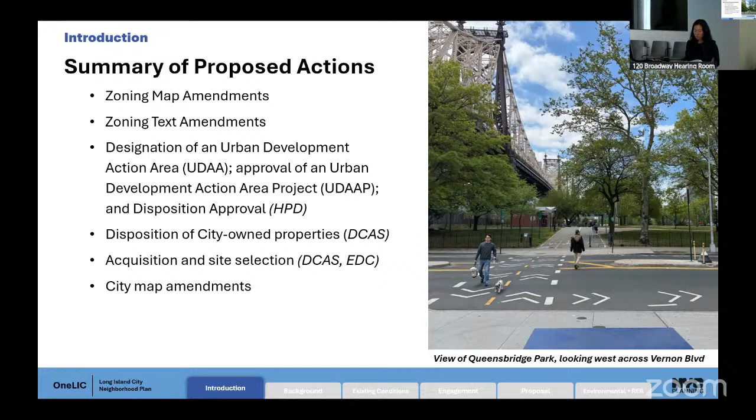With co-applicants DCAS and EDC, we are seeking approval for acquisition, site selection, and disposition of non-residential city-owned property. Lastly, we're proposing city map amendments to demap existing paper streets, adjust the width of other streets, and map a new public loop road.

The project area, shown by the dotted line, covers approximately 54 blocks of Long Island City in western Queens. The majority of the project area is located within Community District 2, which includes the neighborhoods of Long Island City, Sunnyside, and Woodside, while a smaller portion to the north is located within Community District 1, covering Astoria and parts of Long Island City. The project area is entirely within Council District 26, represented by Councilmember Julie Won.

Next, we'll share a summary of the history of Long Island City.

This 1940s photo captures Long Island City's East River waterfront, with the Manhattan skyline in the distance. To the right, the iconic Pepsi-Cola sign and Anable Basin are visible, key landmarks that speak to the neighborhood's deep industrial roots. Anable Basin once served as a critical site for maritime industry, with barges and ships transporting goods in and out of LIC's factories and warehouses.

LIC's waterfront location made it a prime destination for industrial businesses in the early 20th century. The opening of the Queensboro Bridge, Queens Midtown Tunnel, and the expansion of subway service connected Queens to Manhattan and helped fuel the area's growth. By the 1950s, LIC had become a manufacturing powerhouse. But by the 1970s, the neighborhood began to experience widespread vacancies in its industrial buildings, leading to job losses and a shrinking residential population.

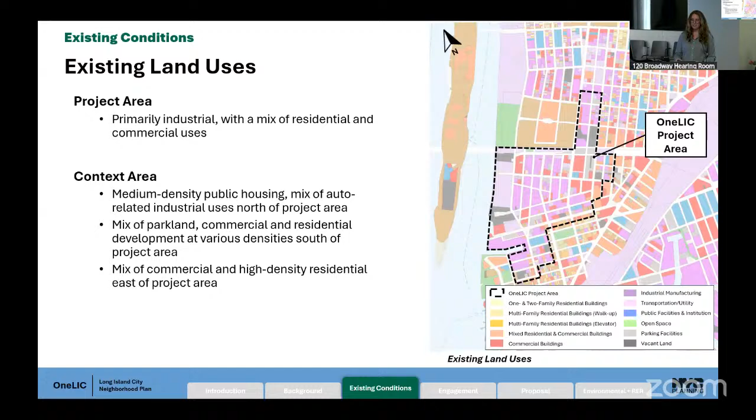Long Island City features some of the highest levels of transit accessibility in Queens. The wider context area is served by 8 subway lines, 15 bus lines, 2 Long Island Railroad stations, ferry service, and nearly 20 miles of bike lane.

The LIC context area is home to large waterfront open spaces like Queensbridge Park and Gantry Plaza State Park, while Murray Playground, Court Square Triangles, and Pocket Parks serve the inland area. Given the area's industrial legacy, there are few parks within the project area, but Gordon Triangle and 12th Street Plaza are well loved by the community. And the Long Island City Waterfront Pier serves as the only waterfront public access point to the East River.

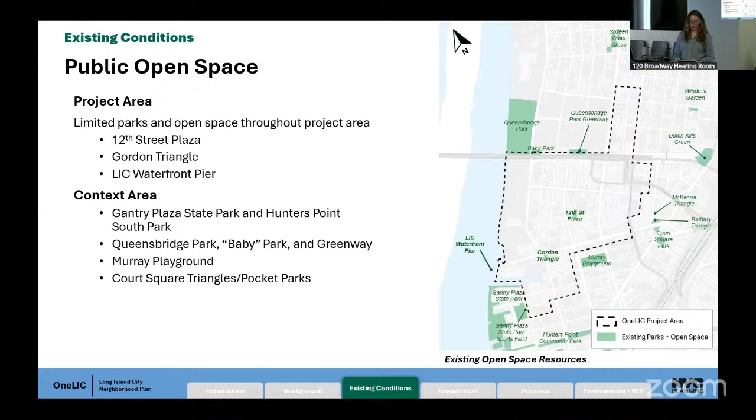Next, we will share existing conditions of the project area, broken down by 4 distinct sub-areas: the waterfront, corridors, LIC Core and Queens Plaza, and the industrial sub-areas. We will walk through the photos, starting with the waterfront.

Beginning with this view across Anable Basin, this photo shows where the basin and East River converge. The Queensboro Bridge can be seen in the background to the left, while Court Square can be seen in the distance to the right.

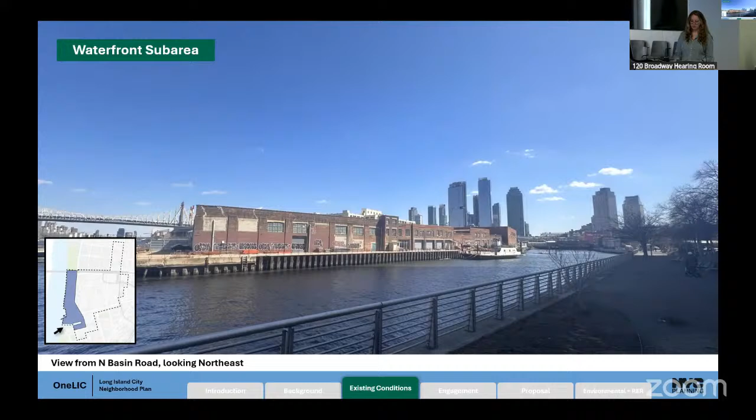Next, we move inland to Vernon Boulevard, a major north-south corridor within the project area. Looking south, this photo shows the intersection of Vernon and 44th Road. The mix of building types range from this 1940s New Deal era building on the right to more modern structures like the glass building on the left.

Moving north up Vernon Boulevard, looking east towards Court Square, this photo shows Queens Plaza South with the Queensboro Bridge above.

Next, we move to the corridor sub-area, which includes the area around 44th Drive and the area located east of the basin. This photo is taken from the intersection of 44th Drive and 23rd Street and shows a newer mixed-use development. The elevated 7 line can be seen on the right.

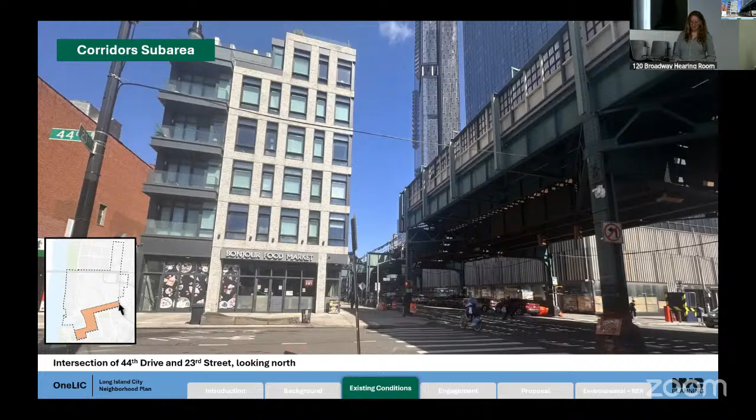Moving south to the intersection of 45th Avenue and 21st Street, we see a mix of medium-density residential uses with some active ground floors.

Next, the Core and Queens Plaza sub-area. This sub-area covers the area north of Queens Plaza and the area just west of Court Square. This view from 21st Street shows NYCHA's Queensbridge Houses campus to the left, juxtaposed by recent commercial development on the right.

Now, we jump to 43rd Avenue, looking west towards Court Square. This photo demonstrates the truly mixed-use feel of the neighborhood. Here, the elevated 7 line separates the older warehouses in the foreground with the newer development of Court Square in the background.

Lastly, the industrial sub-area, moving west to the intersection of 21st Street and 44th Avenue. This building, which houses the Queens Medallion Leasing, is representative of the area's unique local businesses.

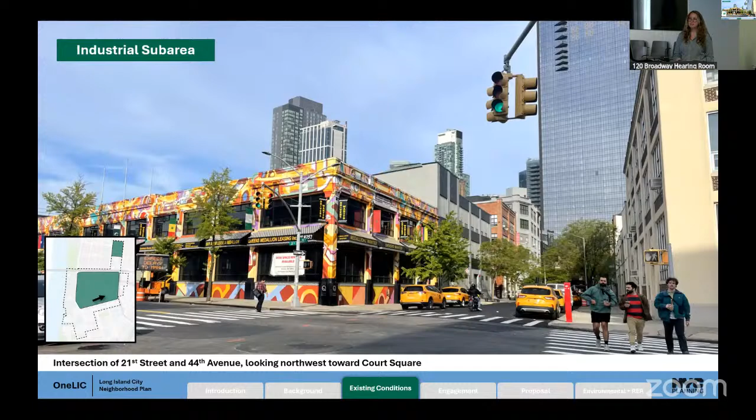Moving north along 21st Street to the intersection of 21st and 43rd Avenue, this photo captures the iconic Silvercup Studios, an example of adaptive reuse of the former Silvercup Bakery.

Now that we've seen what the neighborhood looks like today, we will continue with some of the broader trends and policies that have shaped it.

Long Island City's context area has seen a significant increase in residential development and an almost 100% population increase to go with it. Recent development has been concentrated around Court Square and Hunters Point South, including this mixed-use building pictured here, which is located on Crescent and 42nd Road.

Today, much of the project area is zoned with manufacturing districts, with mixed-use and residential districts zoned along the waterfront, Queens Plaza, and 44th Drive areas.

Despite Long Island City's many strengths and assets, today's zoning is outdated and presents key challenges, such that there are no requirements for affordable housing, low FARs limit growth potential for existing businesses, and unlike in other parts of the city, high-density districts are not eligible for plaza bonuses.

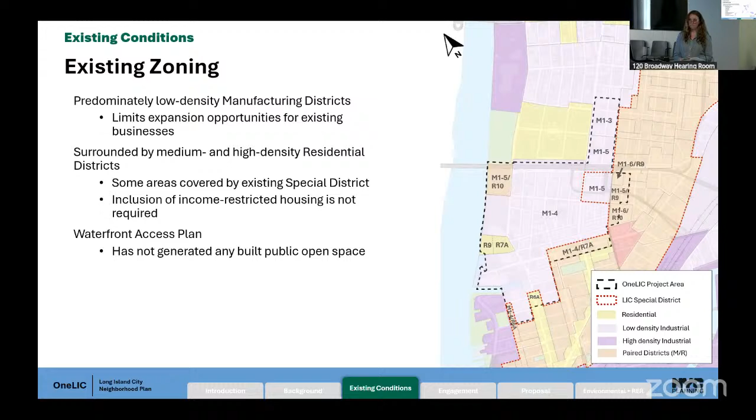Industrial business zones were established in 2006. They were created to support industrial and manufacturing businesses by providing a relocation tax credit to those choosing to move into IBZs. To create more certainty for these businesses, the tax credit was paired with a commitment by the city to not permit residential development in these areas.

There are currently 21 IBZs and 7 are in Queens. This map shows the LIC IBZ shaded in green.

Next, we move to business and job trends. Industrial businesses have historically provided a majority of jobs in both the project and context areas. Over the last decade, this dynamic has reversed with employment in both areas concentrated in non-industrial sectors, which includes office, local service, and institutional jobs.

The project area shows declining employment across all sectors, while employment in the wider context area is increasing. However, this growth is coming from non-industrial sectors.

The Woodworks building, located on 44th Road, demonstrates the shift from predominantly industrial uses to more commercial or mixed-use buildings. Where a single-story manufacturing building once stood, we now see a full-block, mixed-use, industrial and office development that caters to more neighborhood-serving uses, such as interior designers, sports clubs, and contractors.

Lastly, we have the Waterfront Access Plan, or WAP. The Northern Hunters Point WAP covers the project area's waterfront properties, including those along the East River and Anable Basin. The first of its kind in city history, the WAP was adopted in 1997 to set forth context-specific waterfront zoning requirements for the conditions along this stretch of the waterfront.

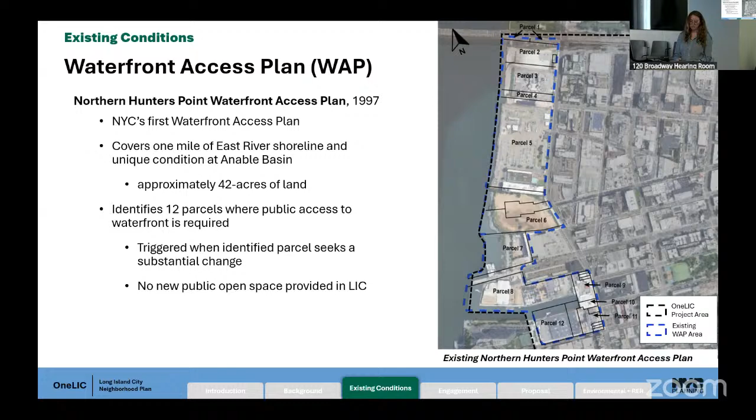Next, I will walk through our engagement efforts for this project. In fall of 2023, we kicked off engagement with the City Council member and WXY to facilitate a robust engagement process. We worked with residents, stakeholders, local businesses, community groups, and elected officials over the course of about 18 months to develop this proposal.

DCP, with Councilmember Won, WXY, and our agency partners, held a series of town halls and focus area meetings to learn about residential concerns, answer questions, and to share about existing city resources. Throughout this process, we've engaged with many agencies, especially HPD, Parks, EDC, DEP, and DOT, to align community feedback with ongoing work and to explore options for new city projects, programs, and policies.

In total, we held 16 public meetings and received over 5,750 comments from about 1,800 attendees. In the winter of 2024, the Department of City Planning and Councilmember Won's office each released surveys asking the community to share their vision for the city-owned sites. Combined, these surveys gathered over 2,350 responses.

The following goals emerged from over a year of community engagement and conversations with agency partners. Goal 1, create more housing for people at a range of income levels. Goal 2, create a connected, resilient, and accessible waterfront from Gantry Plaza State Park to Queensbridge Park.

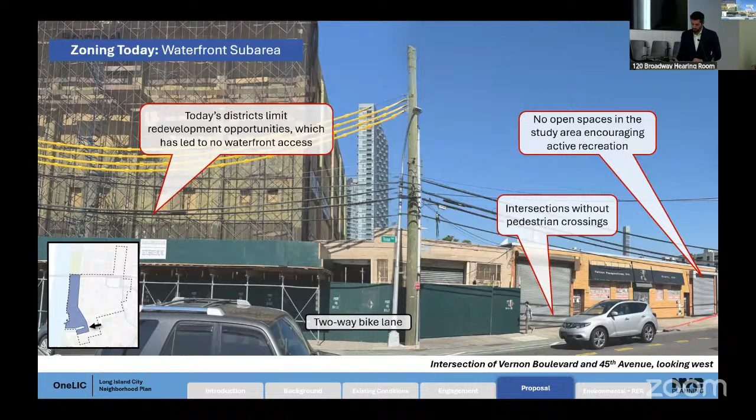And today, without a good reason to bring the public to the Basin waterfront, this stretch of Vernon Boulevard remains a deterrent for pedestrians and cyclists to navigate the area safely.

New buildings would be required to meet more stringent codes that would inspire a more eco-friendly urban character and improve climate resiliency. The proposed special district sets forth zoning regulations to encourage a built form that integrates new development within LIC's vibrant mixed-use character while balancing with controls to guide building form.

The proposed special district regulations for the waterfront sub-area are driven by the following urban design principles. First, the special district would include provisions to activate lower floors by requiring more access points to the waterfront, maintaining a lower base height along Anable Basin, and requiring that certain building frontages be occupied with active uses and designed to facilitate a walkable waterfront experience.

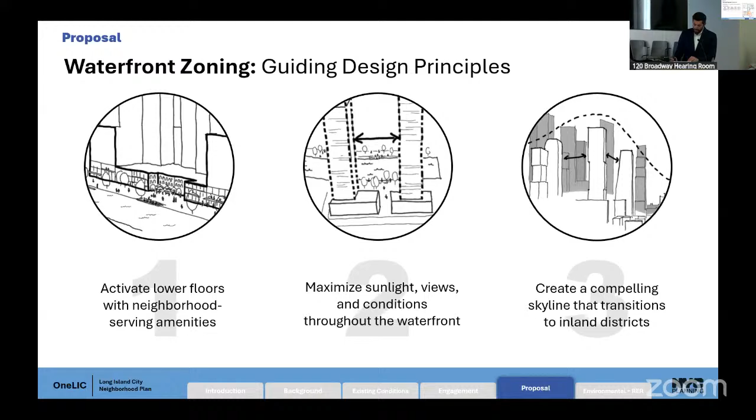As noted earlier, today's zoning along the waterfront is mostly M1-4, which restricts residential uses and limits the opportunity for business growth. The proposal would map an M1-6A/R9 district around Anable Basin and along the East River, and an M1-5A/R8 district on parcels fronting 44th Drive, continuation of our zoning treatment upland.

Our team has studied the unique site conditions and opportunities up and down this stretch of waterfront. The waterfront access plan embodies a long-term vision for a continuous waterfront open space that meets 4 core goals. First, it expands LIC's open space amenities to complement those found in Queensbridge Park, Gantry Plaza State Park, and Hunters Point South.

Secondly, it capitalizes on the setting of this unique waterfront to facilitate a mix of both active and passive open spaces. Third, it ensures design quality is beyond the city's baseline standards. And most importantly, it improves neighborhood resiliency.

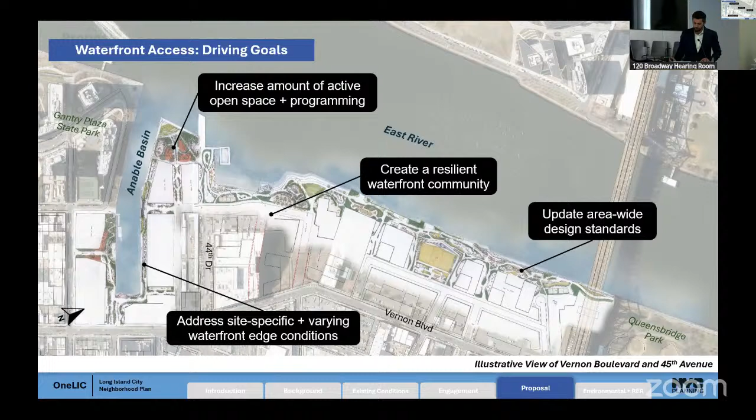While new buildings along the waterfront will be held to updated flood resiliency construction standards, this proposal includes other proactive measures to strengthen LIC's coastline.

The waterfront access plan will establish a target elevation along the shoreline to make sure waterfront open spaces are protected from sea level rise and can withstand some storm events.

Waterfront regulations will permit and encourage a variety of shoreline treatments to create a dynamic and engaging ecosystem along the East River and Anable Basin. Waterfront parcels will also be subject to stormwater catchment regulations through rules that were very recently updated.

And most importantly, the proposal to amend the city map includes the elevation of a new city street, which Hae-Kyung referred to as a loop road. This would lift a part of this sub-area well above future tidal flood depths and make it easier for new businesses to activate the sidewalk.

Another key piece of the proposal addresses a familiar challenge with many waterfront public access areas: there is often not enough space or incentive to provide active recreation amenities. We've consistently heard during community engagement that future open space needs to include a variety of activities for all ages and backgrounds, such as spaces for play, exercise, entertainment, and culture.

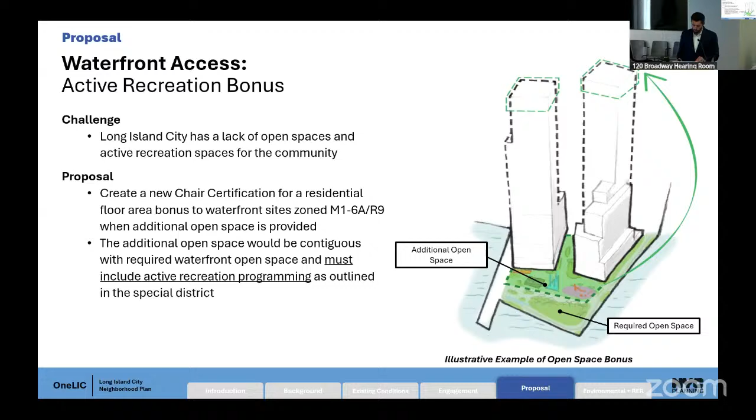The bonus would not only facilitate eye-catching open spaces, but a waterfront that can be enjoyed through different times of the year, open spaces large enough to include multiple levels of flood resiliency strategies, and open spaces that invite many people from sunrise to sunset.

The revised waterfront access plan would facilitate a stronger and more connected waterfront. While a core goal of this plan is to establish a north-south connection linking Gantry to Queensbridge, the points of access to Anable Basin and the East River are integral and are expanded through the provisions and regulations here.

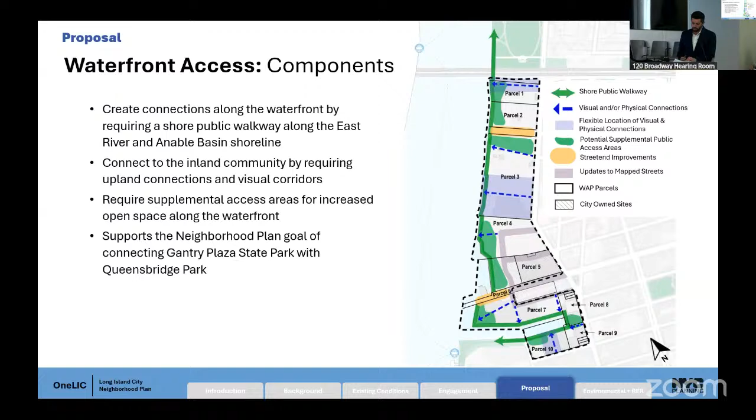This type of condition should not exist at the intersection of two legitimate main streets, especially where they are surrounded by one of the area's most notable public spaces. The proposed actions would remove this zoning impediment and help realize a new vision for these corridors.

By rezoning to new districts that permit residential, there is an ability to grow LIC's housing stock and require income-restricted units throughout this sub-area.

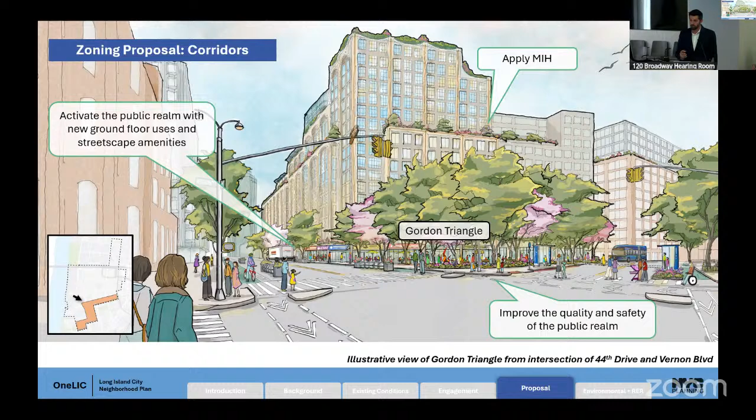Acknowledging the lower density character near Murray Playground and south of the study area, the proposed districts in orange and yellow would step down along Vernon Boulevard and further into Hunters Point.

Mandatory inclusionary housing is mapped throughout all of the shaded areas on this map to ensure future residential development includes income-restricted units. Here's a closer look at the height and setback controls for each of these M and R paired districts. Each district has a maximum base height and maximum building height.

The maximum permitted height of buildings scales up from 95 feet for mid-block areas east of Vernon Boulevard to 155 feet along 44th Drive, to 215 feet west of Vernon as one moves closer to the waterfront.

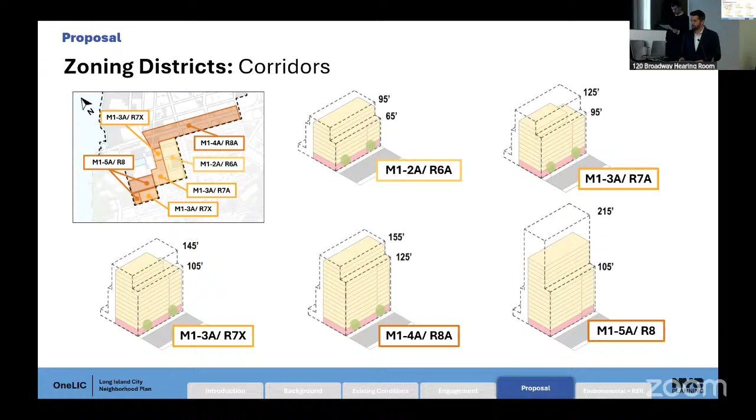I will now pass it off to Colin Ryan to proceed with the industrial sub-area. Thanks, Colin, and good afternoon, Commissioners.

Today's industrial areas within the IBZ are a workforce center, host to a variety of businesses. While many of them serve citywide needs like office construction, there has been a growth of businesses that directly serve the LIC neighborhood, such as barbershops, breweries, and sports clubs.

In recent years, the creation of the 12th Street Plaza acts as a public realm intervention for workers and neighborhood residents alike. However, today's zoning continues to restrict growth of these businesses, while the public realm conditions can be hostile for pedestrians seeking to access these amenities.

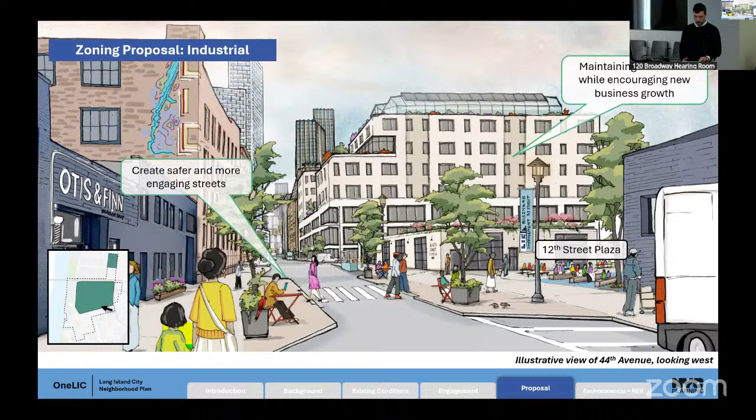The proposal for this sub-area would maintain the same uses allowed in industrial areas today while encouraging business growth. Building on the success of the 12th Street Plaza, the proposal would apply limited streetscape regulations along key corridors within this sub-area in order to create a safe and engaging public realm.

The proposal calls for applying a variety of M1A districts, mapping M1-6A, an 8 FAR district, closest to the high-density core of LIC. M1-5A, a 6.5 FAR district, would be mapped to step down away from the core and relieve constrained street networks. Lastly, the M1-4A will be mapped to right-size the needs in the more strongly industrial center of the IBZ and to the north as a step down to the Dutch Kills neighborhood.

Today's LIC core and Queens Plaza area hosts a variety of land uses. Within Queens Plaza, the redevelopment in recent decades has delivered on housing production, but underlying zoning did not require affordable housing. There are also no incentives within the existing special district to encourage the creation of open space, leaving the neighborhood without sufficient green spaces.

Other areas, however, are still zoned M today and are either vacant or underutilized based on the proximity to transit at the Queensboro Plaza and 21st Street Queensbridge stations.

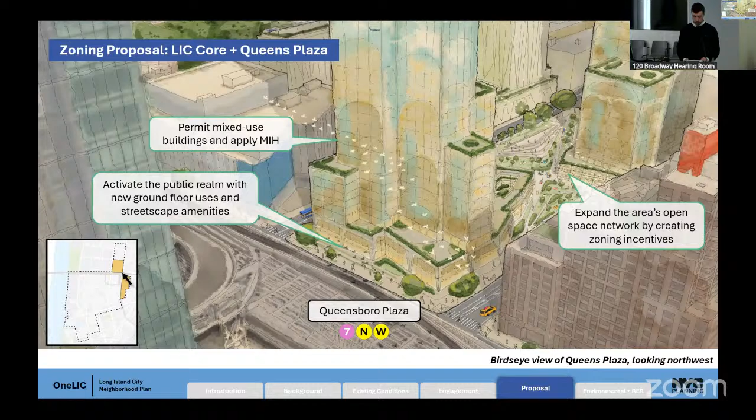The proposal calls for expanding and introducing high-density mixed-use districts as already mapped directly to the east, while providing income-restricted units. Streetscape regulations would be applied along key corridors in order to create an engaging public realm. An open space bonus would also be introduced to this area for the first time.

The proposal would map M1-6 paired with R9 and R10 districts adjacent to transit stations and existing high-density mixed-use districts near Court Square. The M1-6/R9 district permits a higher commercial and manufacturing FAR at 15, while the R10 paired districts permit a higher residential FAR, but max out at 12 across all uses.

Areas receiving no changes to use or bulk are currently zoned for the proposed districts. Zoning districts south of the Queensboro Bridge do not include a height limit, similar to the existing districts adjacent to them. This would provide flexibility in the envelope for the delivery of other incentives within the special district.

It would also encourage improved building forms through encouraging towers instead of bulky, squatter buildings that feel imposing at the street level. The M1-6A/R10 district to the north, however, would impose a height limit to 750 feet to address concerns of shadows on the adjacent Queensbridge houses to the west.

As mentioned before, LIC's open space network is very limited, particularly in the core. As part of the special district, sites larger than 25,000 square feet within the sub-area would be permitted to seek an authorization for a floor area bonus in exchange for providing publicly accessible open space. Proposals would require an application process that includes further environmental review.

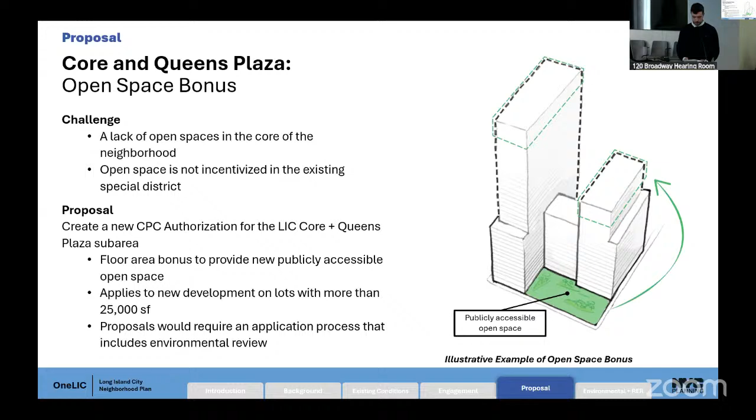Through engagement and close coordination with the School Construction Authority, we learned that there is a strong need for schools in this area, while finding appropriate sites for them can be challenging.

The limited number of public sites in the study area also requires the city to look towards private land to develop schools. In order to ease school siting, the special district would create an exemption for floor area used for schools up to 150,000 square feet. This exemption would apply across the entire project area. To accommodate bulk relief, the special district would also include an authorization for height up to a maximum of 30 additional feet.

The proposed actions also call for a zoning text amendment pursuant to Appendix F to map MIH to portions of the project area shown here in orange. This will result in approximately 4,000 permanently income-restricted units in Long Island City.

There are also site-based proposals with the related actions. The project area has 3 city-owned sites near the waterfront, centered along 44th Drive, 2 sites under the bridge to the Ed Koch Queensboro Bridge, and lastly, the Con Edison property, while not a city-owned site, is also subject to site-specific actions.

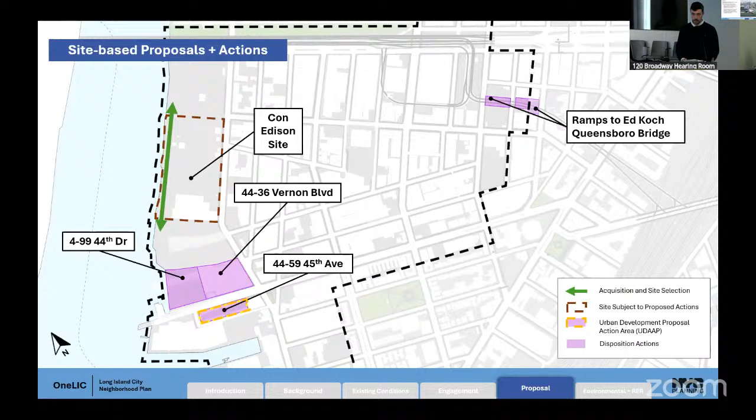3 sites along 44th Drive were the subject of a public workshop held this winter to better understand the community's vision for this portion of the waterfront. A set of community visions were developed based on feedback from the workshop. First, an active community space with housing, open space, commercial space, and community facilities to serve the needs of existing and future LIC residents. And second, a new waterfront open space that would complete the vision for a continuous public waterfront from Queensbridge Park to Gantry Plaza State Park.

Now that we've introduced the 3 city-owned sites, let's take a closer look at the specific actions proposed for them. This photo shows the existing structure at 4459 45th Avenue. The approximately 42,500 square foot site is currently used for the DOT storage and operations. The site is the subject of a UDAP action.

To meet the plan's goal of creating more housing for people at a range of incomes, co-applicant HPD is seeking a UDAA designation, UDAP project approval, and disposition of a city-owned property to facilitate the development of approximately 320 new income-restricted units, with potential space for a new community facility that could include an educational component and/or retail.

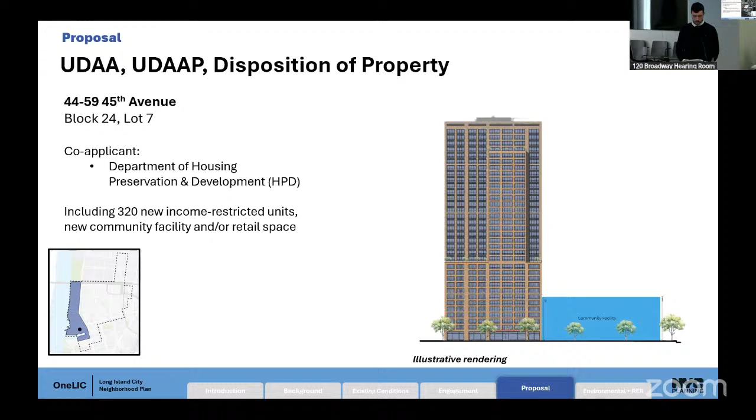With co-applicant DCAS, we are seeking disposition of the city-owned property at 4436 Vernon Boulevard and 499 44th Drive. These properties are currently occupied by DOE offices that support their citywide operations and an adjoining parking area. Community interest in the transformation of these sites has led to this proposed action. Approval of this action would give the city the ability to redevelop the site with community-serving uses expressed by the public during our engagement process.

Following certification, EDC plans to issue an RFI, or request for information. The RFI will allow respondents to share their concerns or concepts to convert all or a portion of the building to other commercial, light industrial, retail, and or community serving uses.

The lots under the ramps to the Ed Koch Queensboro Bridge are also subject to disposition approval at Block 428, lots 12, 13, and 16, and Block 429, lots 13, 15, and 29. The disposition action is necessary for the city to enter into any future agreement with private entities on the adjoining privately owned sites. At this time, there are no known projects, but this act would allow the city to maintain control over what development rights are conveyed for the greater need of the city.

Project development would occur through a future RFP process where detailed programmatic requirements such as open space would be outlined in a request for proposals.

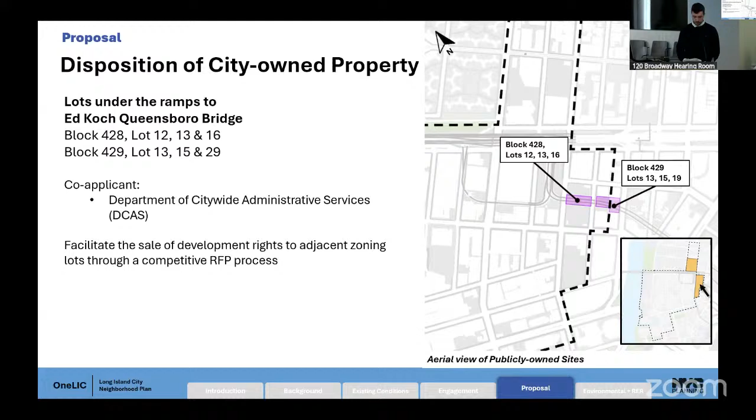A major waterfront property included is the Con Edison Learning Center, which fronts along the East River and is located approximately 600 feet south of the Queensboro Bridge. Due to its critical role as a training facility for the utility company, we do not expect redevelopment on this site in the near future. Regardless, the neighborhood plan strives to reach one of its leading goals to connect the East River waterfront from Gantry down to Queensboro Bridge, to the Queensbridge Park.

As co-applicants, DCAS and EDC are seeking acquisition and site selection of a portion of Block 488, Lot 114, which aligns with the nearly 900-foot-long waterfront portion of the Con Edison property. Approval of this action would grant the city the ability to acquire the waterfront portions of this lot in the future, facilitating the continuous connection along the shoreline.

The existing street network along the waterfront does not provide sufficient circulation to align with the proposed actions. For example, 45th Avenue is 30 feet wide, which is well below citywide standards, while 44th Drive, just a block to the north, is excessively wide along the block that it terminates at 100 feet wide.

In order to enhance circulation and right-size streets to create a distinct waterfront, we are proposing a series of changes to the city map, including mapping a new loop road, labeled here as 5th Street, connecting 45th Avenue and 44th Avenue, demapping street ends at 44th Drive and 44th Road, widening substandard streets at 45th Avenue, realigning portions of 44th Road, and narrowing portions of 44th Drive in order to create an accessible, intimate, and well-connected public waterfront.

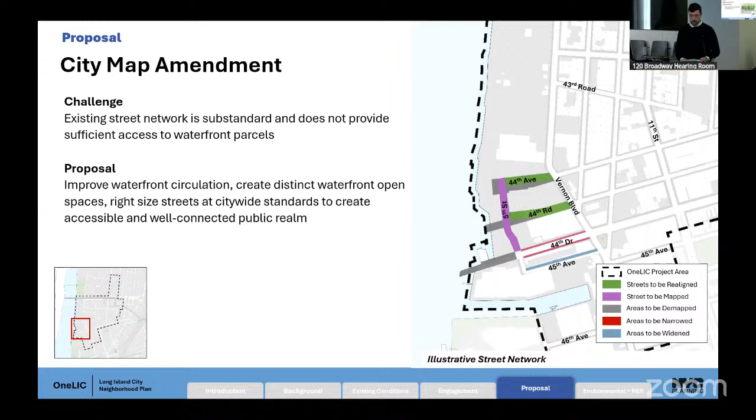In addition to land use actions, OneLIC also includes various city-led programs and investments to support the increase in density and land use changes. While long-term investment in the public realm and infrastructure are being considered, we want to highlight a few existing and ongoing investments, some of which are a response to recent engagement. These new capital projects reflect the city's commitment to a holistic neighborhood plan.

For example, DEP is working closely with DCP on a drainage analysis of localized and area-wide sewer planning.

Also, as you can see on the slide, New York City Parks is currently making additions to Queensbridge Baby Park. This park is located between Queensboro Bridge and the Queensbridge houses, which was previously a maintenance yard, and is being turned into a community gathering space that includes a lawn, benches, and game tables.

The School Construction Authority, or SCA, has a number of planned investments and ongoing projects in LIC. By academic year 2029, the neighborhood will see 2 new elementary schools with approximately 1,100 new school seats.

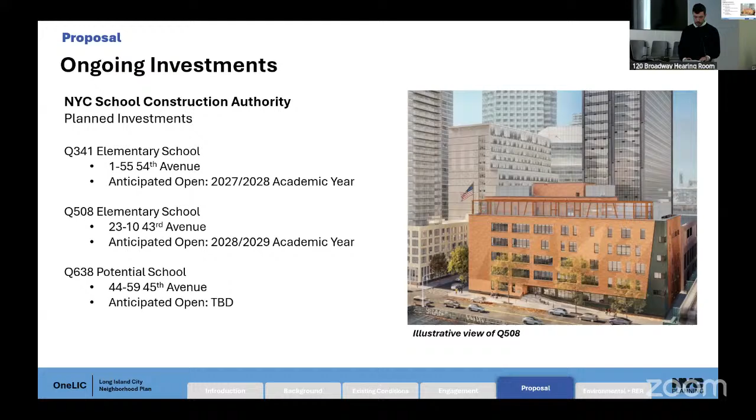In addition to generating new income-restricted units by applying MIH and the development of new units on city-owned land, we also seek to preserve affordability through a range of tenant and homeowner protections through HPD programs.

To proactively combat landlord harassment and tenant displacement, the city will launch the Partners in Preservation Program in LIC and Sunnyside, which funds local community-based organizations to do tenant organizing, canvassing, and know your rights workshops.

To retain and stabilize homeowners and support generational wealth building for LIC residents, the city is investing in the Homeowner Help Desk, a one-stop shop for financial and legal counseling around foreclosure prevention, deed theft, and home repairs. The city is also increasing access to Home Fix 2.0, a low and no-interest home repair loan program.

Partnerships with local CBOs and elected officials to educate tenants and homeowners about their rights and available resources will also be offered through trainings, classes, and resource fairs.

Finally, and thank you for bearing with us, I'll summarize the findings of the environmental analysis and racial equity report.

As part of this application, a draft environmental impact statement, or DEIS, was prepared. DCP, acting on behalf of the CPC as lead agency, issued a notice of completion of a DEIS on April 18th, 2025. Where the DEIS does not identify significant adverse impacts, technical areas have been grayed out.

On the questions that other colleagues were asking about the schools and the open space impacts, just wanted to drill down on those a little bit. On the schools impact, which is fairly significant, as the DEIS notes, 140% over the 10-year build-out, in a place where it's very, very hard to find sites, as you've pointed out.

I'm wondering whether any of the private development sites have raised their hand to say yes, we will take the floor area bonus if the rezoning proceeds. And, again, to put some helpful pressure on the conversation, whether there's been any meaningful interest around actually using the floor area exemption, I should say.

There are conversations that are continuing to be had with some of the developers. Their interest in helping and being part of this neighborhood is also critical to them. So the conversations are being had.

Okay, so I guess, just echoing the earlier point about Con Ed, that putting some pressure on the development community here to actually then take advantage of the exemption, given the amount of floor area we're talking about. Thank you. And two, over the course of this process, really come forward with some thoughts on which sites make sense.

And then on the public space side of things, under the Queensboro Bridge, which is, if we're really going to connect this to NYCHA, we have to figure that out. I know DOT, whether it's under the Brooklyn Bridge on the Manhattan side or the Brooklyn side, or the Manhattan Bridge on the Brooklyn side, has struggled to release its under-the-bridge assets, but with enough political pressure finally does. So I'm just curious where DOT is on that conversation of releasing that space.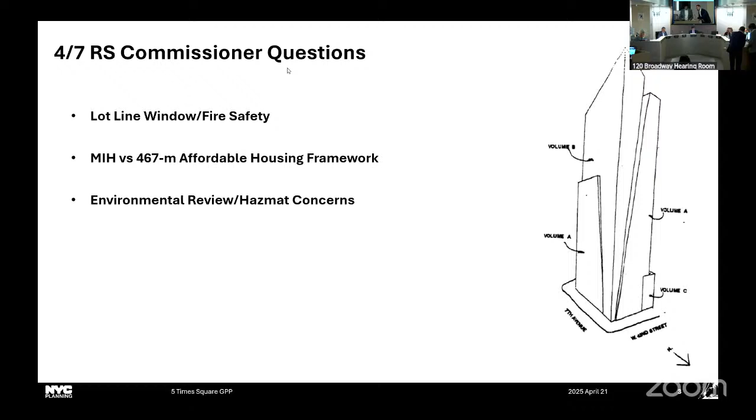Well, so in this case, being a GPP, MIH isn't applicable, but the applicant's complying with 467M. We don't have the scope to enforce MIH here, so they're complying with the regulations of the MDL, which require affordable above 12 FAR, and in this case, it dovetails with 467M. So that's 25% at 80% AMI.

Okay, I think my question is slightly different, which is that if this were a zoning change to allow for residential in a zone that only allowed commercial, presumably we would match MIH, and we'd have 25% at 60 AMI with 10% at 40 AMI, or another option that the commission thought were appropriate.

In this case, I think we have to send a recommendation back to ESD. So I'm just trying to understand why our recommendation wouldn't be back, hey, we have an affordable housing framework in New York City that facilitates conversion of buildings. It happens to be at different AMIs than state legislation, but we want to go further, and we think we have a rationale for why, and we think it works economically, which is why we apply it in MSMX or other areas where we're doing similar conversions.

We could add that. If the commission would like, we can add that into the letter recommendation as our recommendation of the ESD board. I mean, I think my perspective is if this were in the MSMX, for example, we wouldn't be permitting the 25% and 80.

So just because it happens to be a few blocks north and subject to a GPP rather than a zoning change, I think for the sake of consistency we should make clear that's our affordable housing framework. Your recommendation would be to refer to what our rules would otherwise have been if done through MIH, and encourage them to go as far as they can here. I have no objections to that. Okay, so we can include that in.

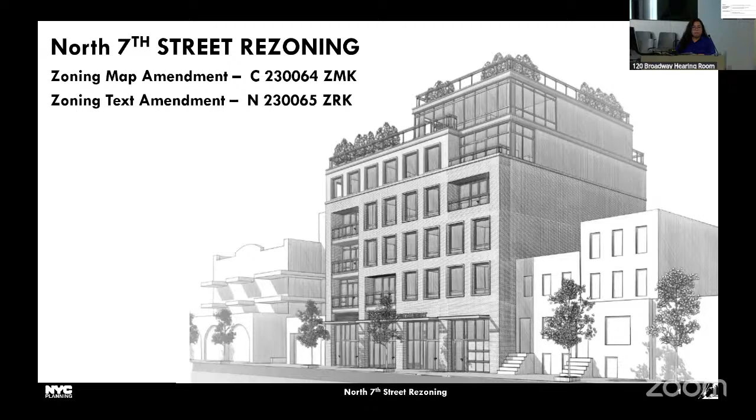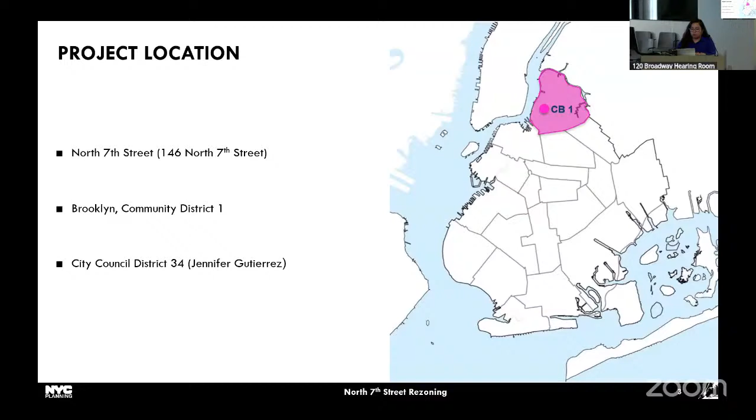Good afternoon, Commissioners and Chair Garodnick. Today I will be presenting a private application for a zoning map amendment and zoning text amendment at 146 North 7th Street for a pre-hearing. You first heard about this project proposal on January 6, 2025. This is a private application by 4 private homeowners to facilitate the construction of a new 6-story mixed-use building. The applicant is seeking a zoning map amendment from R6B and R6B/C1-4 to R6A/C2-4, and a zoning text amendment to map an MIH area with options 1 and 2. The project is located within Community District 1 in Williamsburg, Brooklyn, and is within Councilmember Gutierrez's district.

The proposed building will include approximately 3,320 square feet of commercial floor area, 23,554 square feet of residential area to build 28 dwelling units, 7 of which are income restricted. The building will provide 19 parking spaces for bicycles and 3 voluntary parking spaces.

The applicant is proposing a zoning map amendment from R6B and R6B/C1-4 to R6A/C2-4 to facilitate the construction of the proposed development. R6A is a contextual zoning district that permits a residential FAR of 3.9 with MIH and a community facility FAR of 2.2, with a base height of 65 feet and a max building height of 95 feet. In Zone 1, or the inner transit zone, no parking is required. C2-4 districts are commercial overlays that facilitate ground floor commercial uses and have looser parking requirements than the existing C1-4 district.

The applicant is also proposing a zoning text amendment to Appendix F to map MIH. The applicant is mapping MIH Option 1 and MIH Option 2, each of which requires income-restricted housing set-asides, where Option 1 requires 25% of units at an average of 60% AMI, and Option 2 requires 30% of units with an average of 80% AMI. There are 9 MIH areas mapped in Community District 1 between 2021 and 2024.

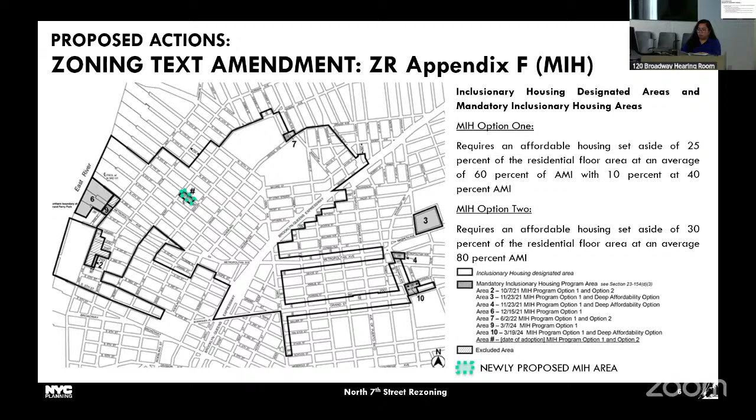The application was referred out to the Community Board for 60 days. During this time, the Community Board met and voted to unanimously approve the application with conditions. Community Board members expressed their concerns in the resolution, requesting that the Community Board office and the community be provided with a point of contact to receive and respond to problems and complaints during construction. The applicants will actively communicate with the Community Board office and provide a schedule of activities that will affect the neighborhood. Finally, in good faith, the applicants will consider contributing to the enhancement of the nearby streetscape.

The Borough President held a hearing on March 26th and submitted a recommendation of approval on the evening of April 15th. This concludes my presentation, and I'm happy to take any questions.

Questions? Okay, great. We will pick this one up on Wednesday. Thank you very much. Great. Thank you.

The 11th item on our agenda is a pre-hearing review of a zoning map, disposition of city-owned property, and a city map amendment in the Bronx Community District 10. Our presenter is Stephen Johnson. Hello, Stephen. Hello, good afternoon.

This is an application by Bally's New York Operating Company, LLC, for a city map amendment, a zoning map amendment, and a disposition of city-owned property to facilitate the development of a gaming facility and associated uses located in Ferry Point Park in the Bronx. The City Parks Department is a co-applicant on this project, as they are on all map change actions related to parkland, and the Department of Citywide Administrative Services is also a co-applicant related to the disposition action.

In this presentation, when I refer to the applicant, I am referring to Bally's. The project was certified on January 21st and is back for a pre-hearing review session. The City Planning Commission public hearing will be on April 23rd. It will also serve as the public hearing for the draft environmental impact statement. Written comments for the DEIS are accepted by the lead agency until 5 p.m. on Monday, May 5th, 2025.

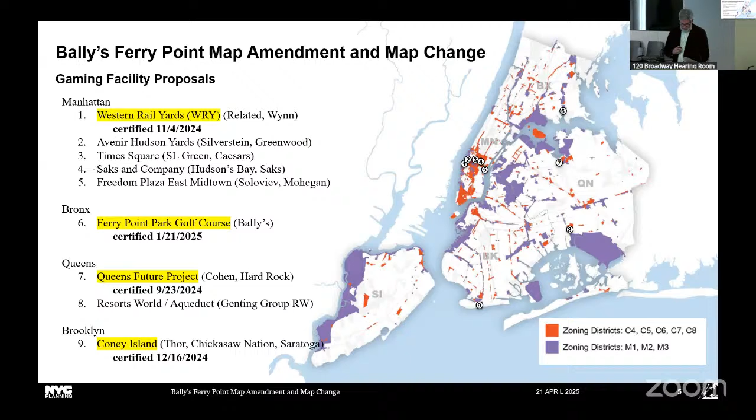The state's current schedule is up here on this slide. All applications must be submitted to the state by July 27th, which is also the start of the Community Advisory Committee review period. Each individual CAC will have public hearings and solicit feedback from the public, then vote by September 30th, 2025, requiring a 2/3 majority to approve, before forwarding the application to the gaming board.

Ferry Point Park was initially a 171-acre parcel that came under the jurisdiction of Parks in 1937. The development site was a landfill from the 50s, 60s, and 70s.

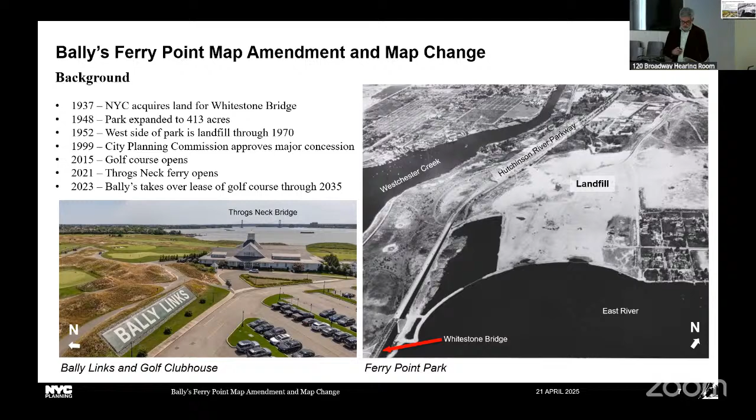The City Planning Commission approved a major concession for a golf complex in 1999, and the public 18-hole golf course opened in 2015.

This is the area map of the proposed development. There's a small residential area to the west and a manufacturing area to the north. This is an illustration of the proposed development site.

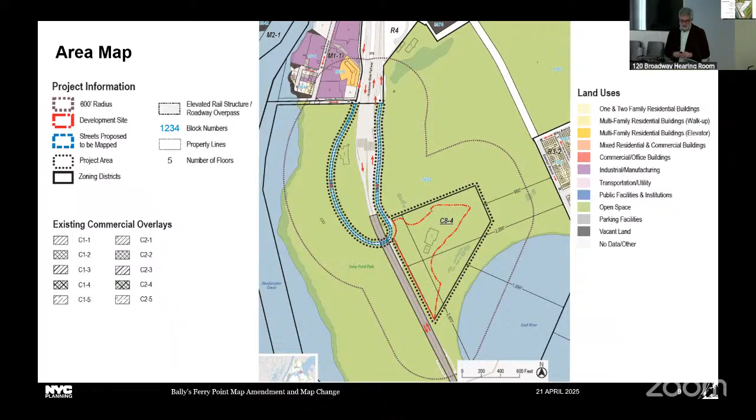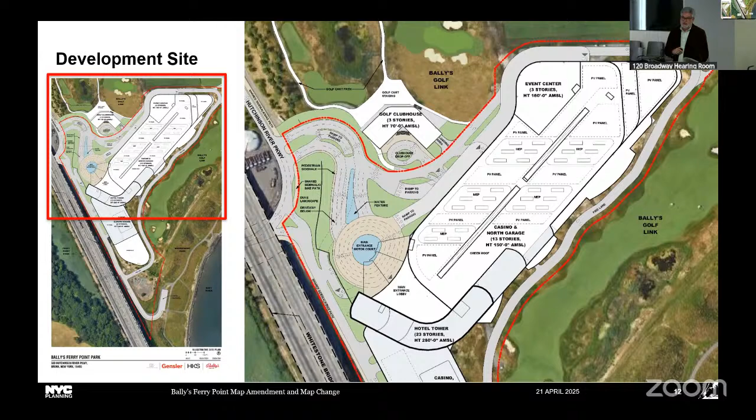Here is the southern end of the proposed facility. You can see the proposed widening of the waterfront access roadway with a new bike path. This road leads to a small public parking area and walking paths into the waterfront.

Here we have an existing condition view from the Bronx Whitestone Bridge. You can see the existing clubhouse behind the flag that's waving there. And this is the proposed development from a similar angle with the building heights.

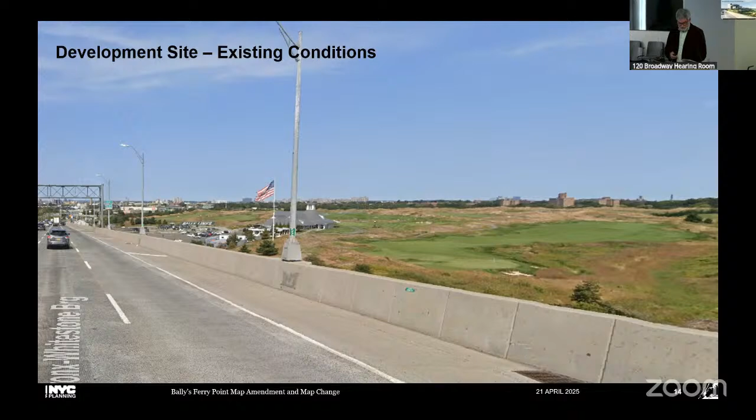So now Bally's has committed to a number of improvements. If the project moves forward, many of them are related to park improvements and would be determined in consultation with the community board, local elected officials, and the Parks Department. The applicant has also proposed a number of transportation improvements related to Ring Road, new bus stops, ferry shuttle service, and pedestrian and bike paths.

The proposed gaming facility is planned to be a Gold LEED certified building. The applicant believes this would be the largest private development in the history of the borough, and includes 15,000 construction jobs and 4,000 permanent jobs.

One item I want to mention that's new from when it was certified - I included a PDF in your briefing packages on this material. The applicant has proposed a community benefit fund that would fund a variety of local projects, such as schools, sports, and health concerns, and the applicant can describe that at the public hearing.

So just moving quickly on to the actions here. As I mentioned, the first is the city map change, which has two parts. The first is to demap a 15.7 acre area of parkland corresponding to the proposed gaming facility, and to map a city street under the jurisdiction of the city DOT.

The second action is a zoning map amendment. The applicant is seeking to map a C8-4 zoning district in a portion of the development site. The C8-4 permits commercial uses with a maximum FAR of 5, with no residential uses.

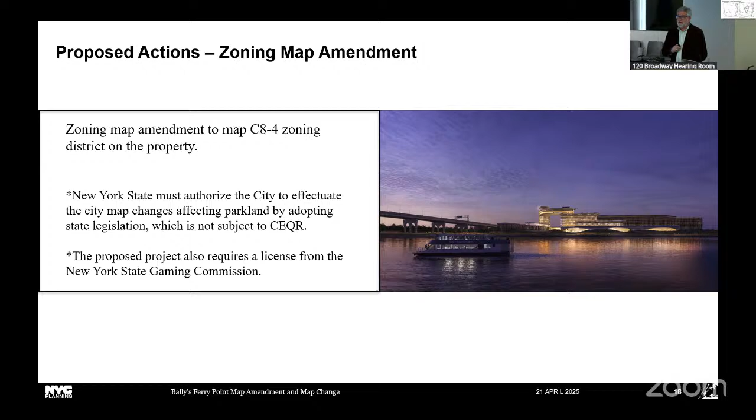Here we have a map of the existing zoning on the left and the proposed C8-4 on the right. And then finally, the third action is the disposition of non-residential city-owned property for a portion of Lot 1, Block 5622. This is for an approximately 43,000 square foot non-exclusive access easement over the waterfront access roadway. This is the green area on the map.

So moving on to the public review. CB10 held a public hearing on February 25th. And on March 20th, they voted against approval of the application by a vote of 5 to 29.

In the letter they sent in for the project, the community board stated that they voted against the project, but they included a list of requests that they make annually as part of their district need statements. That list included a number of items, including improvements and investments to Throgs Neck Houses, park improvements, and community board participation in a community benefit agreement.

And here we round out the list of 10 items that they had. Now, the Bronx Borough President—you should have gotten a copy of their resolution, which came in this afternoon.

The Bronx Borough President's letter recommends approval with conditions. Among those conditions, the BP included that Bally's should fund new open spaces across the Bronx, and noted a community benefits agreement with enforceable commitments to local hiring and workforce development, public safety, support for small businesses, cultural and community investment and development, and the ongoing contributions from Bally's.

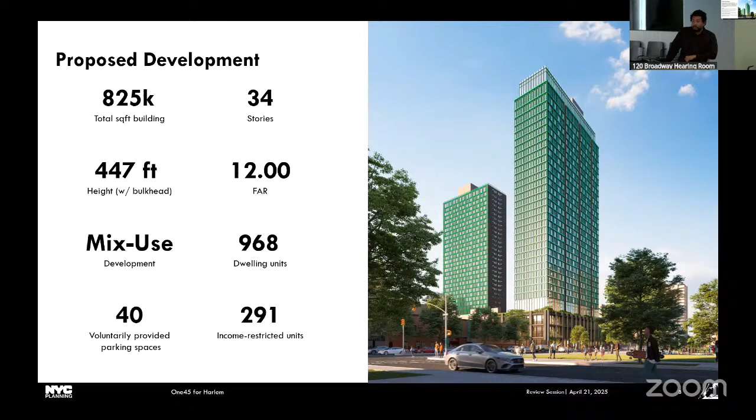The actions are a zoning map amendment to remap the existing C8-3 R7-2 to a C6-4 zoning district, the mapping of MIH in the area, as well as a special permit to allow the location of a gathering space at the top of the tower, including also a certification to allow one additional curb cut on the narrow street, which is located in West 144th Street.

Recapping the recommendation of the department, the department recommends approval of the application and all the proposed actions. The department believes this location is currently underutilized land, and it will be redeveloped into a dynamic mixed-use complex, delivering not just housing but also community benefits to the area.

As I mentioned before, 968 total units of housing, addressing city initiatives like the Blueprint, Housing New York 2.0, City of Yes, and others. The department encourages the applicant to continue working with Community Board 10, local organizations, city agencies, and elected officials to ensure thoughtful development of a proposed community benefit package, as well as effective implementation of an enhanced affordability plan. Just a reminder, these are not part of the certified plan, not in the consideration of the CPC, but those were conversations that happened during the public hearing, as well as materials shared with the commission ahead of time.

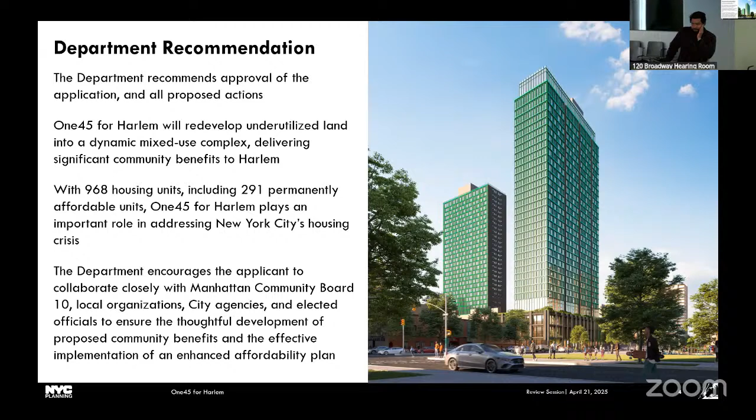I know at one point we heard from both the applicant and the city that they were trying to endeavor to do more than this, because 291 out of 968 is 30%. They were endeavoring to do more than that on affordable housing. Do you know where those conversations went? Those conversations are still ongoing, as I understand. I believe it's pending approval of what the City Council will do, and also the CPC, to see if they can secure additional funding for the enhanced affordability.

So the 30% is already a given as part of the formula, but we can anticipate we may get more affordable units in whatever tiers they come in. Correct, if HPD has the funds.

Will someone let us know that, just so that we know? I'm curious whether somebody will say to us, after the vote, that the city was able to garner more funds and get more affordable units. I think it would be good for us to know, just to have in our back pocket. I don't know the answer, but I'm pretty sure we can follow up with the commission. It's not going to be tomorrow, I know that, probably in the outer years when they have the monies. But thank you, Jose, I appreciate it.

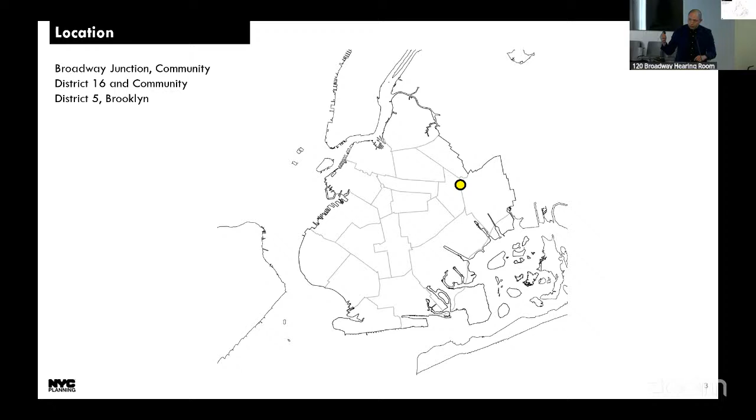Broadway Junction is one of the city's busiest transit hubs. This project is part of past planning and ongoing investments in the area by the city and state. The 2016 East New York Neighborhood Plan kicked off a series of city and state-led investments in infrastructure and services across East New York, including in the Broadway Junction area.

At Broadway Junction, the Parks Department undertook a $22 million renovation of Callahan Kelly Playground, and NYC DOT reconstructed Van Sinderen Avenue, adding a double bus lane and sidewalk extensions to improve bus service and make it safer for pedestrians.

In 2019, EDC undertook a study of Broadway Junction that laid out a blueprint for the future of the area. Among the core goals it identified were making all lines at Broadway Junction Station fully accessible, activating the nearby streets and open spaces, and growing the area into a mixed-use district that is a major job center and accessible to local residents.

Adjacent to Broadway Junction Station, the first phase of the city agencies' revitalizing the economy, CARE, strategy is nearing completion, with a new office building at 2440 Fulton Street, which will be anchored by the New York City Department of Social Services.

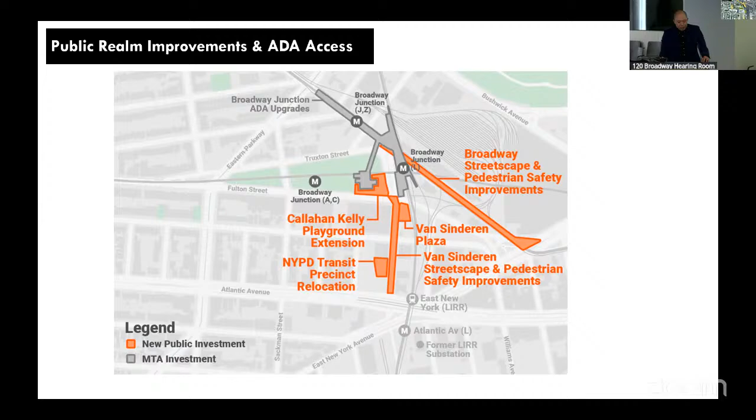The three project sites are located along Van Sinderen Avenue in the immediate vicinity of Broadway Junction Station. The area to the west of the project sites is developed with commercial and office use. Beyond that is a mix of small apartment buildings and 1- and 2-family homes. Directly south of Project Site 1 is the recently completed 2440 Fulton Street, which I just mentioned.

The recently renovated 3.25-acre Callahan Kelly Playground sits directly west of Project Site 1. The area to the east of the project sites includes the East New York Rail Yard and Bus Depot, as well as other utility and industrial uses. The East New York IBZ is to the south of the project sites.

Broadway Junction Station has access to the A, C, J, Z, and L trains. There are also stops for the B20, B25, B56, Q20 and Q24 bus lines. The East New York LIRR station is located south on Van Sinderen Avenue, that's off of this slide, and just south of that is the proposed location of the East New York Interborough Express stop.

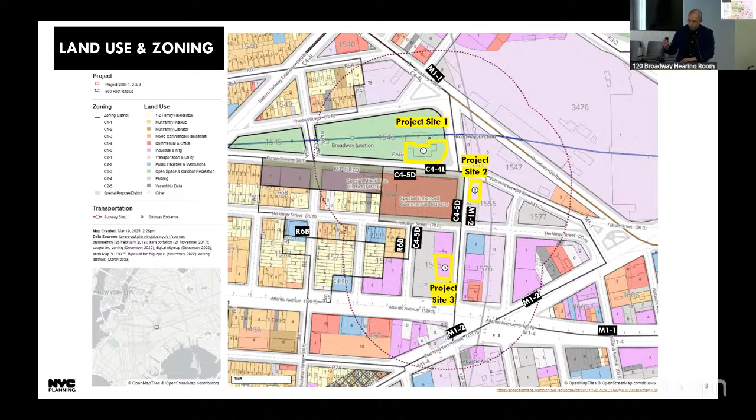The proposed project has three parts tied to broader city-led public realm improvements in the Broadway Junction area. The first is the Callahan Kelly Playground extension, which would entail the creation of 20,000 square feet of public open space outside of the Broadway Junction Station House, where the Transit PD building is currently located. This part of the project requires the relocation of the Transit PD building.

The second part of this project is the development of Van Sinderen Plaza, a 5,000 square foot public open space. The third part is the relocation of NYPD Transit Bureau's 33rd District building from its current location on Project Site 1 to a new building south on Van Sinderen Avenue. These projects will all go through PDC review before construction. Now I'll take you through the three sites.

Project Site 1 is the location of the future Callahan Kelly Playground extension. It is part of a larger city-owned block occupied by Callahan Kelly Playground. It is currently partially occupied by NYPD Transit Bureau's 33rd District building, and it is adjacent to the Broadway Junction subway station.

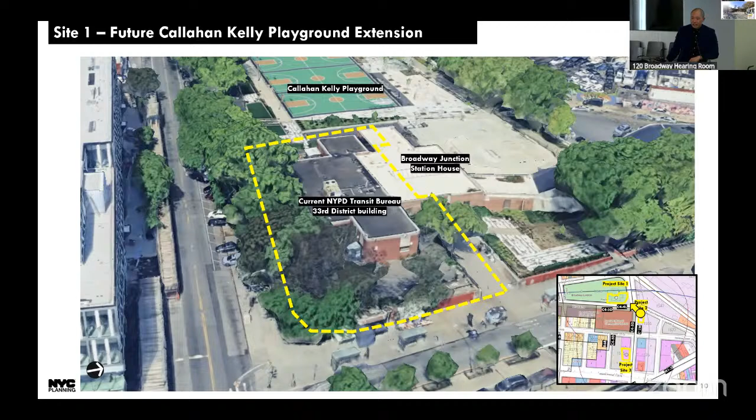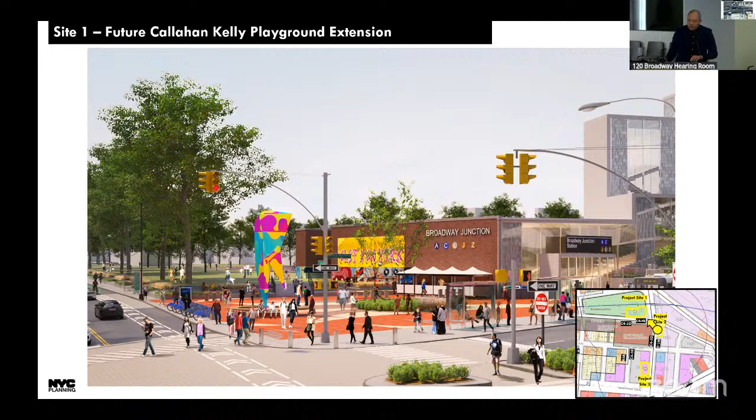Project Site 2 is the location of the future Van Sinderen Plaza. It is part of a larger lot owned by the City of New York and leased to the New York City Transit Authority. It is currently being used as surface parking.

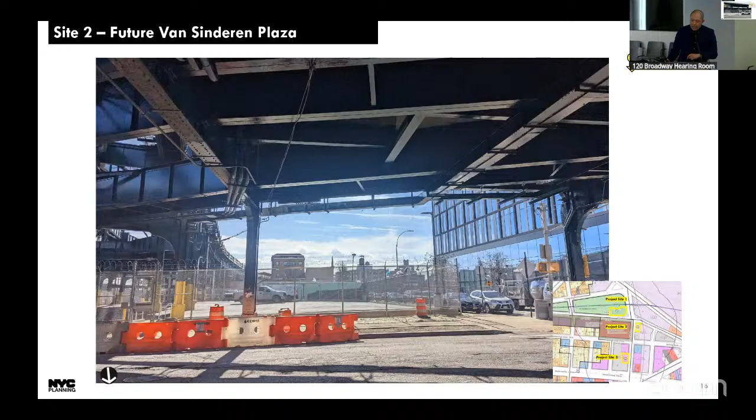Here we look south at Project Site 2 from Fulton Street, and here we look east at Project Site 2 from Van Sinderen Avenue. The proposed Van Sinderen Plaza would be 5,000 square feet of public open space.

Site 3 is the location of the future NYPD Transit Bureau 33rd District building. It is located on Van Sinderen Avenue, though the address is 1508 Herkimer Street. It is a privately owned lot which contains a one-story, 20,000 square foot vacant warehouse.

Here we look south on Van Sinderen Avenue. The project site is on the right. And here we look east on Van Sinderen Avenue at the project site.

The proposed project at Site 3 is a new 4-story, approximately 35,000 square foot, to-be-constructed building for the NYPD Transit Bureau 33rd District to relocate into. The building would include a ground floor community room, offices and workstations, lounge and locker rooms, processing and holding cells, space for officer training, and 10 enclosed parking spots for NYPD fleet vehicles.

The building would accommodate a total of approximately 189 NYPD personnel, with no change in staffing levels expected due to the relocation. District 33 would maintain a 24-hour presence on Project Site 3 due to its personnel being assigned into 3 shifts. All tours include both uniformed and civilian members of NYPD.

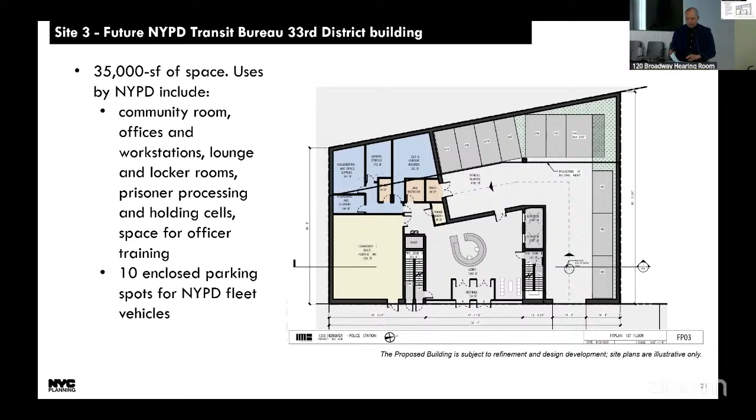There are 4 proposed actions in order to facilitate the project. First, a site selection for city facility to facilitate Callahan-Kelly Playground Extension. Second, a site selection for a city facility to facilitate Van Sinderen Plaza. Third, a combination acquisition and site selection by the city to facilitate the future NYPD Transit Bureau's 33rd District building.

And fourth, a disposition of city-owned property on Project Site 3, which would facilitate the transfer of the remaining development rights on the zoning lot to the owner of the property to the north so that it can be fully developed. In summary, this is an application by NYPD, EDC, DCAS, and NYC Parks for a combination acquisition and site selection, a disposition of city-owned property, and 2 site selection actions.

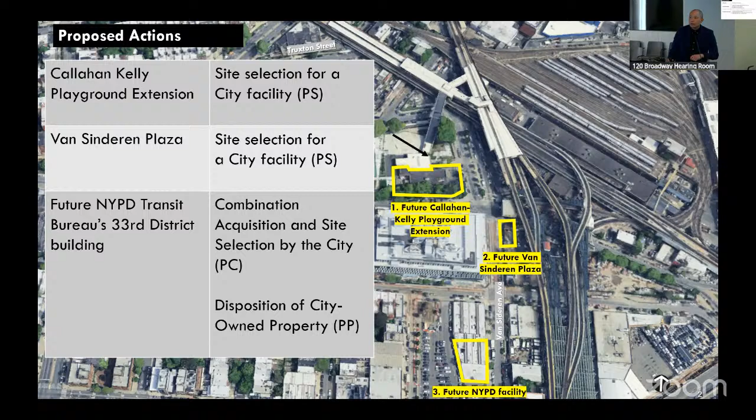The actions would enable the relocation of NYPD Transit Bureau's 33rd District building to a new nearby 35,000 square foot facility. The relocation would facilitate the construction of Callahan-Kelly Playground Extension, a 20,000 square foot open space on the land that the 33rd District building currently occupies. Finally, the actions would facilitate the construction of Van Sinderen Plaza, a 5,000 square foot public open space catty corner from Callahan-Kelly Playground, all in service of the city's broader goals of improvements in and around the Broadway Junction station. Thank you.

Let's see if there are other questions. Okay, all right, thank you, Juki. Seems like we straightened it all. I think you had it totally straight. You straightened it out for me, though. Thank you, thank you, we are certified on this one. All right, let's move on to the next.

Okay, the third item on our agenda is a certification of a zoning map and zoning text amendments in Brooklyn Community District 13. Our presenter is Hanif Yassi.

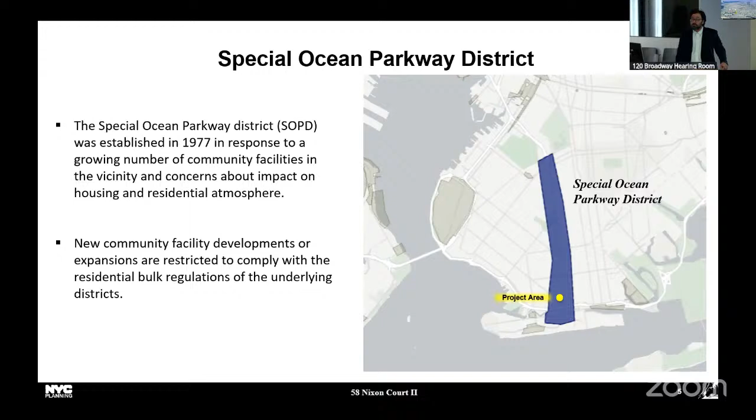The project is located between the Gravesend and Brighton Beach neighborhoods, with Coney Island to the southeast, and Sheepshead Bay to the northeast. It's sandwiched between those four neighborhoods.

The rezoning area includes 5 lots at the intersection of Nixon Court and Shore Parkway between Ocean Parkway and West Street, situated just south of Avenue Z and north of the Belt Parkway, seen to the south there on the slide.

The elevated F train serving communities in Coney Island to the south and Gravesend and Kensington to the north stops at Neptune Avenue Station, approximately half a mile west of the project area.

The B1, B4, and B36 buses are available just south of the project area at Ocean Parkway and Shore Parkway. These buses serve southern Brooklyn, including linking neighborhoods of Bay Ridge and Coney Island to Sheepshead Bay.

Bicycle access is available via Ocean Parkway, a protected bike lane that extends from Kensington to Brighton Beach, one of the longest in the city, I believe.

The proposed development site is bounded by Nixon Court at 60 feet to the north, Shore Parkway at around 30 feet to the south, and the very wide 210-foot Ocean Parkway to the east.

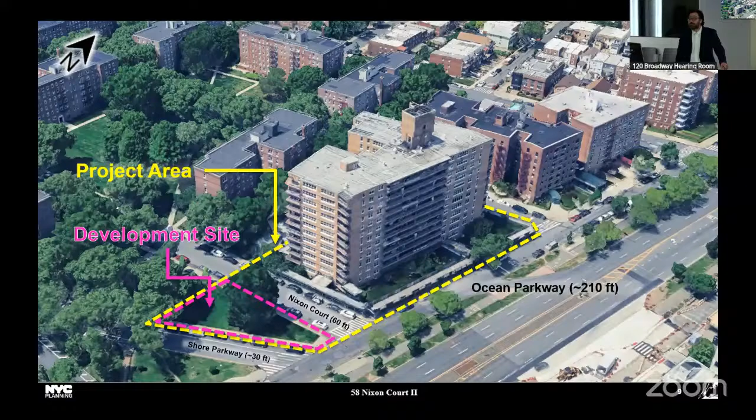The rezoning area includes 5 lots, with the development site comprising 4 vacant triangular lots, totaling approximately 3,500 square feet, with no curb cuts and no history of development.

The remaining lot across Ocean Parkway is a 12-story co-op building built in the 1960s, currently overbuilt under R5 regulations at 5.03 FAR. That lot would become more compliant under the proposed R7A zoning.

The existing zoning is R5, mapped since 1961 and never modified. The surrounding area includes a mix of residential, institutional, and limited commercial uses.

Residential apartment buildings of 6 to 12 stories are common, especially between Shell Road and Ocean Parkway. The area also includes major institutions like Coney Island Hospital, 14 stories immediately to the east, and schools like PS 209 and Lincoln High School.

Two Parks Department managed playgrounds, West Playground and Grady Playground, are within walking distance.

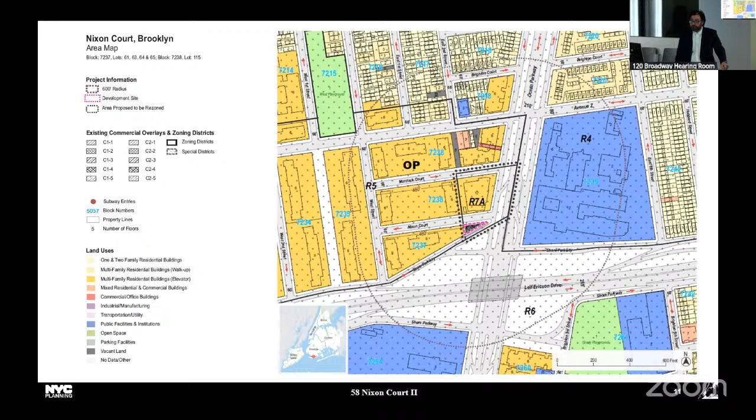Getting into some of these development site and project area images: here's the development site facing southeast from Nixon Court. Here's Nixon Court facing east. Here's a sidewalk along the north side of Shore Parkway facing northeast. And the sidewalk along the south side of Nixon Court, also facing east.

The applicant proposes an 8-story mixed-use building with 19 residential units, including 4 to 6 income-restricted units under MIH, and around 800 square feet of ground floor retail.

The building will rise approximately 85 feet with an additional 10-foot rooftop bulkhead. The 6-story portion will step down near the adjacent R5 district. 7 attended off-street parking spaces will be voluntarily provided, accessed via Nixon Court. A rooftop recreation area is also planned, visible here in the renderings.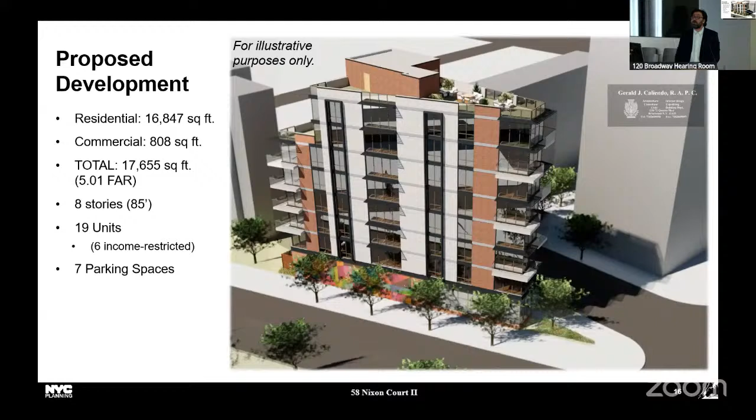The applicant also seeks a zoning map amendment from R5 to R7A/C2-4 for the development site, and R7A for the adjacent lot across the street. The rezoning would provide a contiguous R7A district fronting Ocean Parkway, bringing the overbuilt lot at 2650 Ocean Parkway into better compliance.

R7A permits a maximum FAR of around 5 for buildings including qualifying affordable housing. R7A districts have a maximum base height of 85 feet, a 10 or 15-foot setback on wide or narrow streets respectively, and a maximum height of 115 feet.

C2-4 districts are commercial overlay districts mapped within residential neighborhoods along streets that serve local retail needs. C2-4 districts allow a range of local serving commercial retail and service uses such as grocery stores, restaurants, general stores, barber shops, laundromats, and other similar retail and service businesses.

When mapped within R7A districts, C2-4 districts allow commercial uses up to a maximum of 2 FAR, but commercial uses are limited to the first floor in mixed-use buildings.

Accessory off-street parking is mandated for 15% of dwelling units and may be waived for 25 or fewer spaces. Income-restricted units in the outer transit zone are exempt from parking requirements. All developments in R7A districts are subject to quality housing regulations.

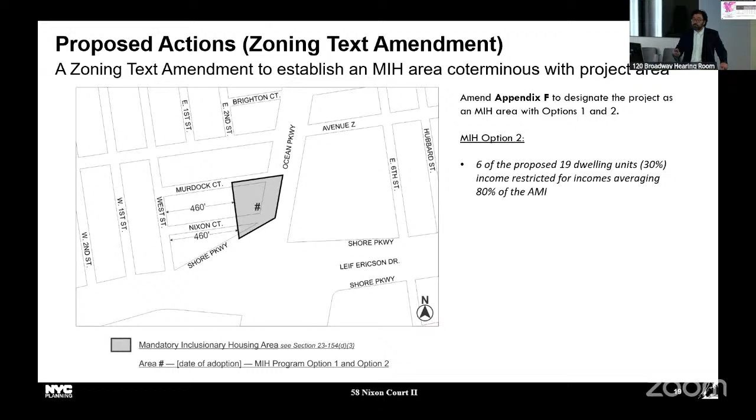Pursuant to Local Law 78 of 2021, this application requires a racial equity report on housing and opportunity because it would increase the permitted residential floor area by at least 50,000 square feet. The applicant states that the proposal would produce new income-restricted housing units in a location that has low income and is highly accessible to transit and jobs.

The median household income for Brooklyn, Brighton Beach, and Coney Island is approximately $41,000 per year. The population of Community District 13 is predominantly white, followed by Asian at 17% and Latino at 16%, with Black residents at 11%.

Between 2010 and 2020, the area's Asian population increased by 49%, and the Hispanic population increased by 2%. The area's Black and white populations decreased by 2% and 6%, respectively.

The area experienced a population increase of 4.7% between 2010 and 2020, and new housing production increased by 6.8%. Even so, between 2017 and 2021, an estimated 32% of households were severely rent burdened, meaning they spent more than 50% of their income on rent.

To conclude, the applicant is seeking a zoning map amendment from R5 to R7A/C2-4 and R7A, and a zoning text amendment to map the area as an MIH area, to facilitate a new 8-story building with 19 dwelling units, including 4 to 6 permanently income-restricted units and around 800 square feet of ground floor retail. With that, I'll take your questions.

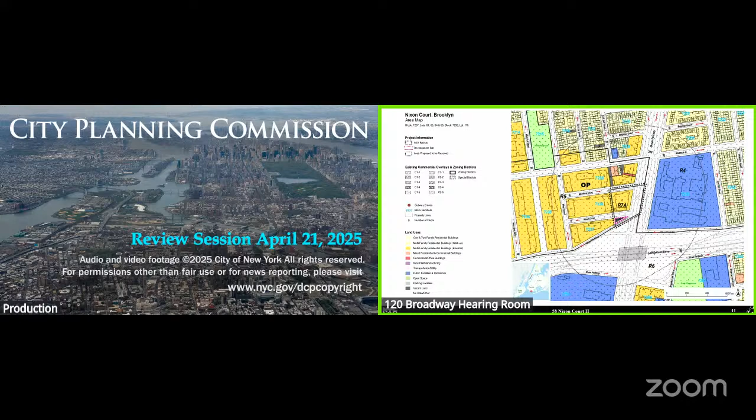My concern is creating a context for future conversion to commercial uses. Coney Island Avenue is just a stone's throw away from Ocean Parkway, and it's a large commercial corridor with tons of retail and facilities that could serve the population of Coney Island Hospital and their employees. So I would urge the department to rethink the C2-4 overlay on Ocean Parkway, especially in light of what it could open up for future applicants.

Thank you, Commissioner Dweck. Let me pose a follow-up question about the proximity here to the hospital and concern about precedent for a commercial overlay on Ocean Parkway. What else might fall into the category or be an analog to what we're looking at here? Obviously, the department has looked at an application with a commercial overlay here, and that's the proposal being certified today. But is there anything else like it on Ocean Parkway? The existence of the hospital, one might argue, and reasonable minds could disagree, but that might be a reason to allow for commercial there.

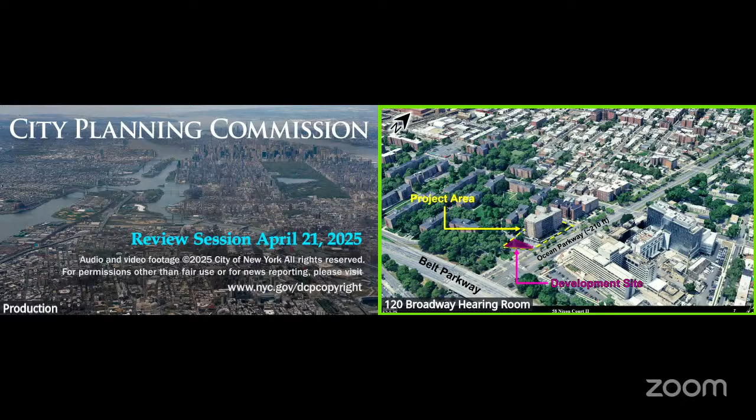Just so I better understand the point, there are areas close to this one where there isn't a flood risk, the rest of the block is pretty much clear. So the question is, are there mitigation strategies that could be employed here, that could create those same conditions? Can the landscaping of the entire block potentially be extended to cover this? Or are there any infrastructure initiatives the city may have in place along Ocean or Belt that we can factor in?

Not too familiar with anything specific there, but it's certainly an opportunity for us to look at the wider area and explore that specific type of condition you mentioned. It's something that didn't come to my mind, taking and analyzing the block by block. I think it's a valuable piece of insight for us to go back and explore. Take a look. Thank you.

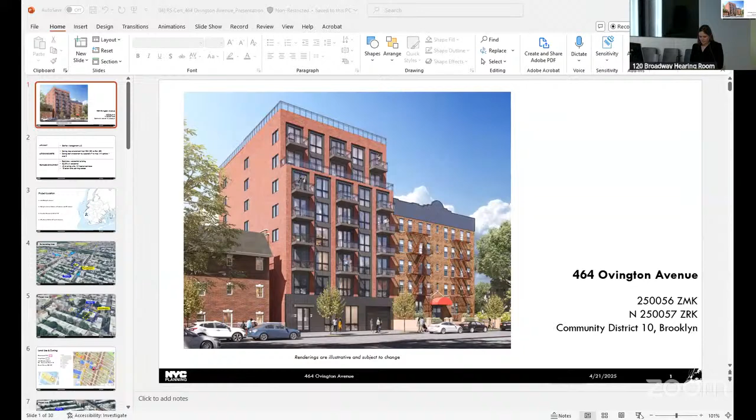This is a private application from Geffen Management, LLC, for a zoning map amendment from an R3X zoning district to an R6A district within the Special Bay Ridge District, and a zoning text amendment to Appendix F to facilitate the development of a new 8-story residential development, including over 36,094 square feet of residential space, or 40 dwelling units, 10 of which will be permanently income restricted, and 18 cellar level parking spaces. The project is located at 464 Ovington Avenue between 4th Avenue and 5th Avenue in Bay Ridge, Community District 10, in Southern Brooklyn. It's located in the City Council District of Council Member Justin Brannan.

This is an aerial view looking north of the project area toward Northern Bay Ridge and Sunset Park. The Brooklyn Army Terminal is northwest of the project area by approximately 1 mile. The BQE is located northeast and east of the project area and eventually filters onto the Verrazano Bridge to Staten Island. Owl's Head Park is located west of the project area near the waterfront.

The project area, shown here in blue, has frontage on Ovington Avenue near its intersection with 5th Avenue. There are several public transportation options for bus and subway service near the project area. The R subway line runs along 4th Avenue, and the nearest stop, Bay Ridge Avenue, is approximately a quarter of a mile from the project area. The R provides local connections to Manhattan and Queens, as well as connections to express trains, the D and the N, as well as the LIRR Atlantic Terminal. There are several bus routes which operate in the area, and the NYC Ferry's Brooklyn Army Terminal stop is about a mile from the project area.

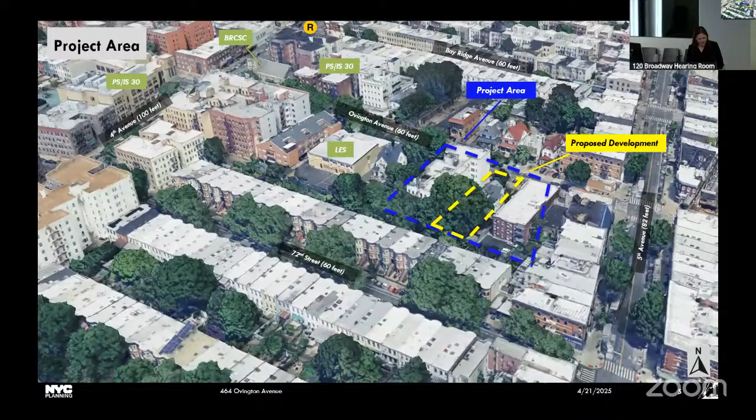Where Ovington Avenue crosses the northbound and southbound corridors, there's a mix of uses, including retail and commercial buildings mixed with residential. 5th Avenue, just east of the project area, is a commercial corridor stretching from downtown Brooklyn to Southern Bay Ridge. 4th Avenue to the west of the project area has medium to high density residential buildings with a mix of commercial and public facility uses.

The block of the project area features 1 to 2 family homes directly north and south of the project area on Ovington Avenue and 72nd Street, 2 to 6-story multifamily buildings, as well as community facilities to the west of the project area. The zoning districts mapped within the surrounding area include R3X, R4-1, R5B, R6B, and R7B residential districts, and C1-3 and C2-3 commercial overlay districts. R3, R4, and R5 are low to mid-density residential districts, while R6 and R7 contextual districts are mid-density residential districts.

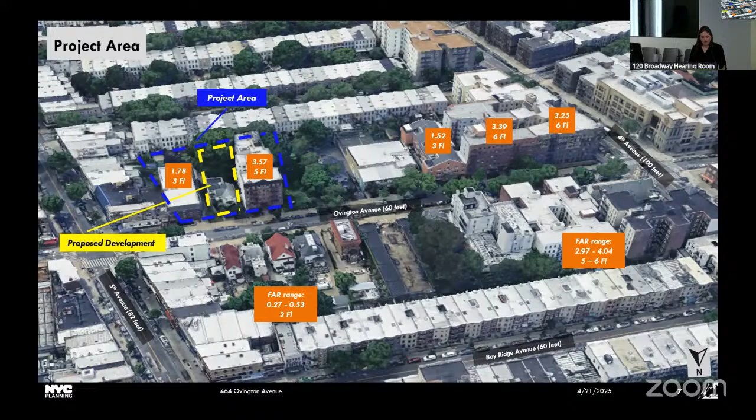You'll see that the FARs in the area are up to 4.04, and the proposed development would facilitate a building of up to 3.9 FAR and 8 stories. You'll see that the building to the right of the proposed development has an FAR of 3.57 and is out of compliance with the current R3X zoning, but it would be brought into compliance with the proposed rezoning to R6A.

The project area is located within an R3X district, which was mapped in 2005 through the Bay Ridge rezoning and was previously an R6 district. Here you can see the zoning before the 2005 rezoning on the left and generally what exists now on the right. R6 and R7 family districts were mapped along major neighborhood corridors, while most of the mid-blocks were mapped with R4 and R5 family districts. This area was one of the few mid-block portions mapped within an R3 district.

The project area is also located within the Special Bay Ridge District, which maintains the neighborhood's existing scale and limits the maximum permitted FAR and the height of community facilities in contextual zoning districts.

This shows the proposed development site shown in yellow head-on, as well as part of the project area shown in blue. Here you can see the proposed development site is improved with a 2-story, 2-family residential building, which is currently vacant. To the west is a 5-story multifamily residential building, and to the east is a 3-story mixed-use residential and commercial building. You can see the proposed development site is underbuilt.

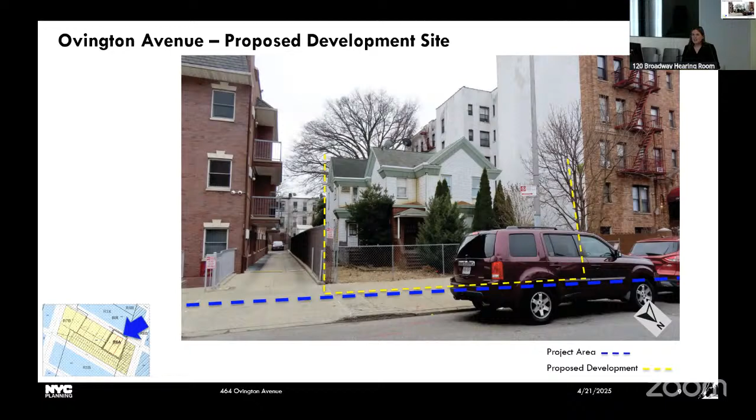Here we're looking east toward 5th Avenue in the distance. The project area is on the right, and the 5-story building on the right is part of the project area, and the proposed development site is located just to the east. Along the left side, there are a mix of low to mid-density residential buildings.

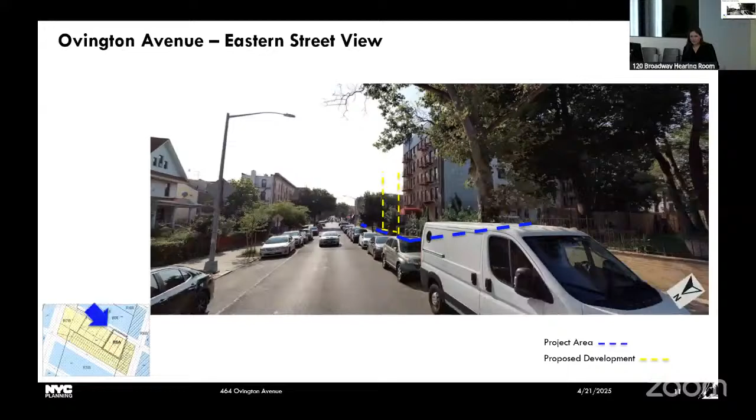The proposed actions would facilitate the development of an 8-story residential building, totaling 36,094 square feet. The proposed development will include 40 dwelling units, of which 10 would be permanently income restricted. Parking would be provided in a cellar level. The applicant is currently proposing 18 accessory parking spaces, 10 spaces more than are required by zoning.

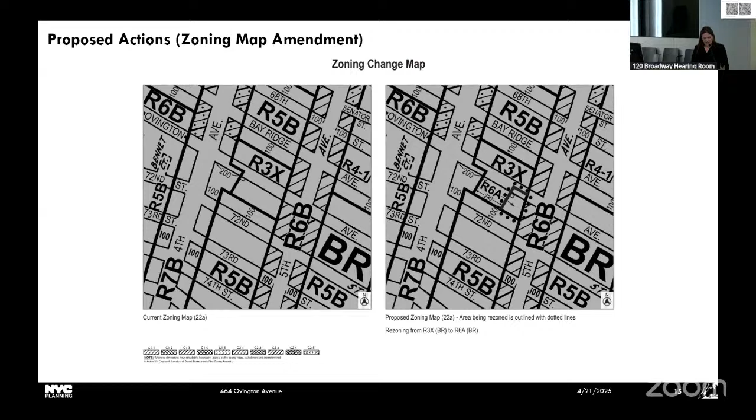To facilitate this project, the applicant seeks 2 proposed actions: a zoning map amendment and a zoning text amendment to Appendix F. The zoning map amendment seeks to change the existing R3X district along Ovington Avenue to an R6A district. The project area is part of the Special Bay Ridge District. An R6A district is a contextual district that allows a maximum residential FAR of 3.9 with MIH, and an FAR of 3 for community facility uses.

The applicant also proposes a zoning text amendment to Appendix F to map MIH coterminous with the project area, creating permanently income restricted housing via MIH options 1 and 2.

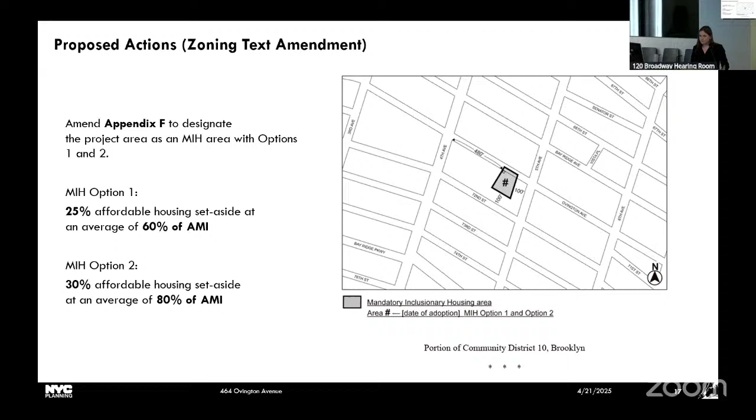This application requires a racial equity report on housing and opportunity. The proposed development would provide new housing units in a neighborhood that has experienced little housing production. The area median household income for the project area is $79,766, which is higher than the median income for Brooklyn and New York City. The applicant proposes to provide MIH units that meet 40%, 60%, and 80% AMI income band limits.

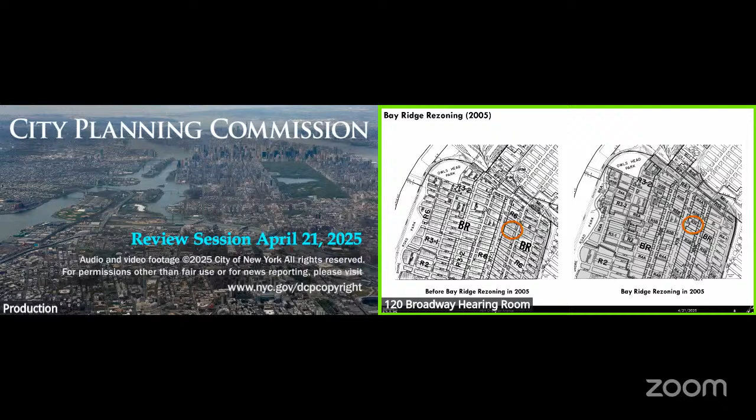Okay, so this block looks like it's got its own special category in zoning in relation to everything else. Back in 2005, everything in the area was an R6. Then it was changed in 2005, and it looks like we have a smattering of R5s, R5Bs, R6Bs, and then this R3X. The R6A that's being proposed here does not feel out of whack in the existing zoning map. But what was the history there for this being an R3X in contrast to everything else around it?

Yeah, I think that's a great question. So as you can see on the left, before the Bay Ridge rezoning, we had R6 pretty much everywhere. We're looking mostly on this eastern side because the western side is a little bit different context here. The Bay Ridge rezoning in 2005 mapped R7B, R6B on our major corridors, and then most of our mid-blocks were R4, R5 family districts. So this was one of the only mid-blocks that was downzoned to an R3. I think pretty much the reason here was that they were focused on preservation and looking at the context of the area. I do hear what you're saying, I don't think that the R6A is necessarily out of context at this point, but that's, you know.

Okay, so it was an effort to match what was there at the time, is what you're saying. Exactly. Okay, all right, thank you.

Let me go to Commissioner Osorio. Thank you, Chair. Thank you for your presentation. Two quick questions. One is, do you have, and if it's in the package, I'll look for it, but do we have a breakdown of the unit sizes?

I don't have it, I don't think I have it on the slides. It should be in the RER, which is included in the briefing package. Okay, I'll look for it there. Yeah, sorry, I don't have it on me.